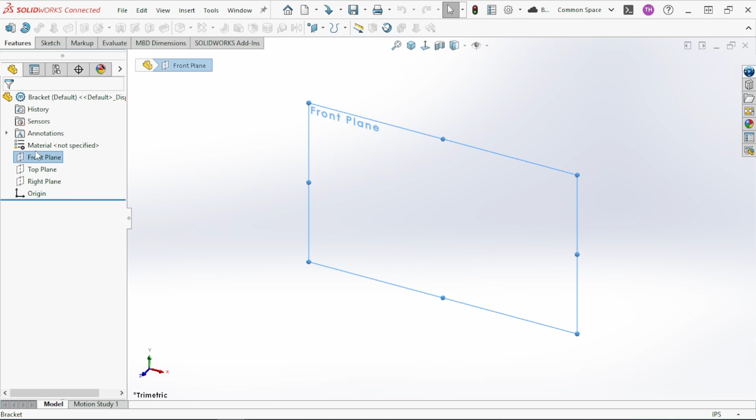So now that we've learned to make sketches and create features from those sketches, I'm going to put it all together and build a little mounting bracket and show you how I do it. So first we create our sketch. If you select a point and a line, you can add a constraint. So I just constrain that to the midpoint.

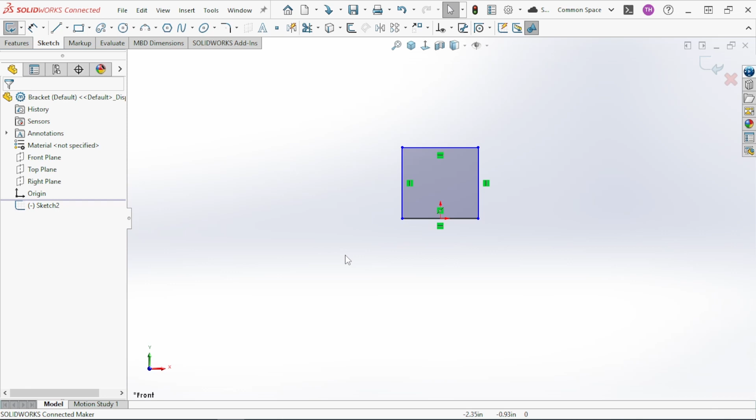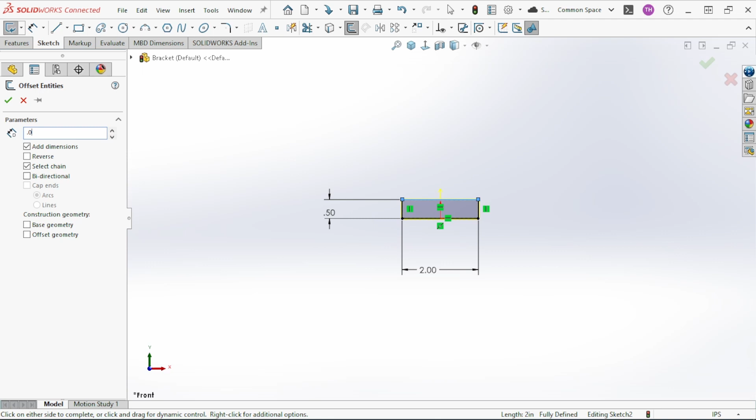I know I need my inside width 2 inches, the height 0.5, and here I'll show you how to use the offset feature. I want a 60 thou wall, and if you notice it offsets it. You can reverse it to the inside or the outside, and I'll extrude that 4 inches long. That'll be my little mounting bracket.

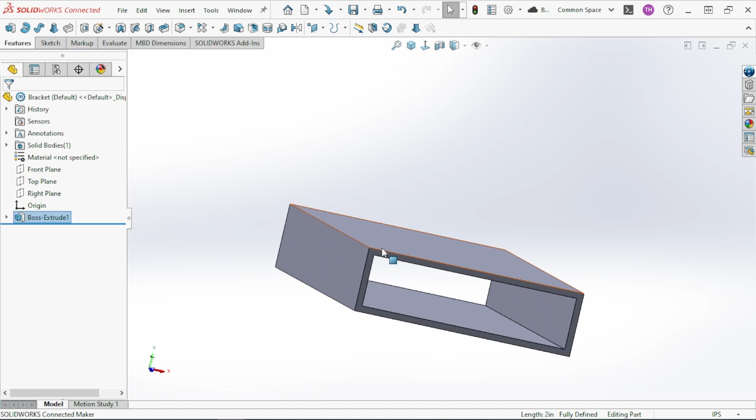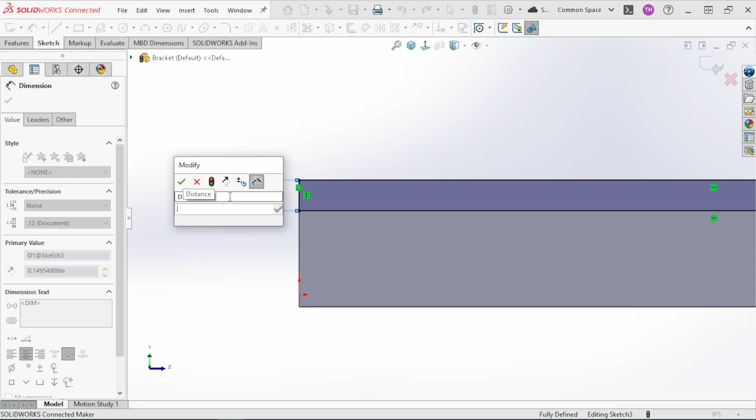Now I need to add some screw ears to it. So I select the face, create a sketch on that face. I want to extrude those out. And then I can mirror that.

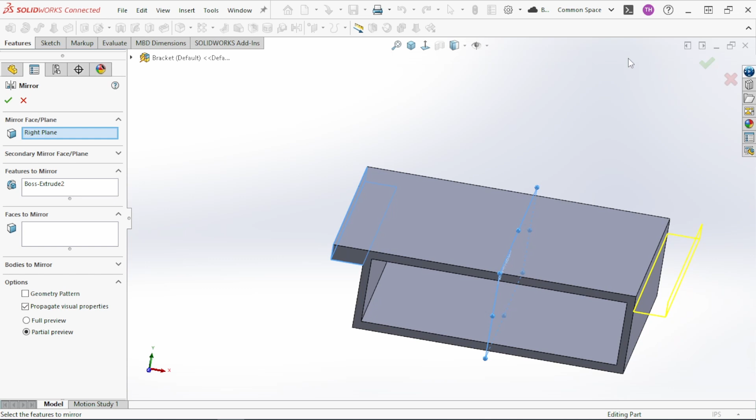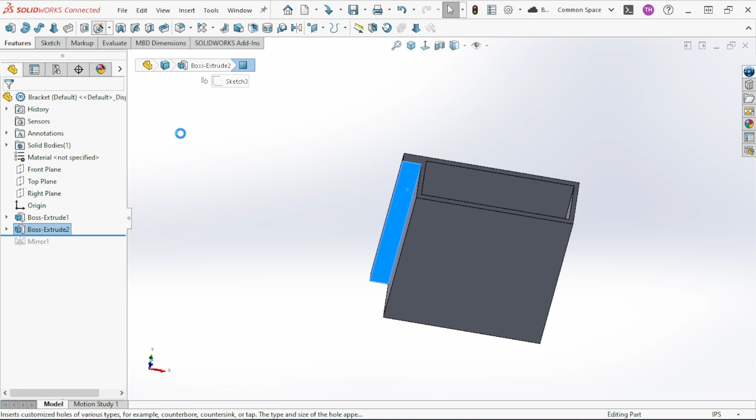And now that I've mirrored it, I forgot I want to put holes in it. So if I just click this bar and drag it up, it's like a temporary undo. So now I can hit my hole wizard and put some mounting holes in there. So I'm going to put in some screw holes, flathead screw, and I know they're going to be number 8s through all, and I can change the... so that way I know the heads will be completely recessed.

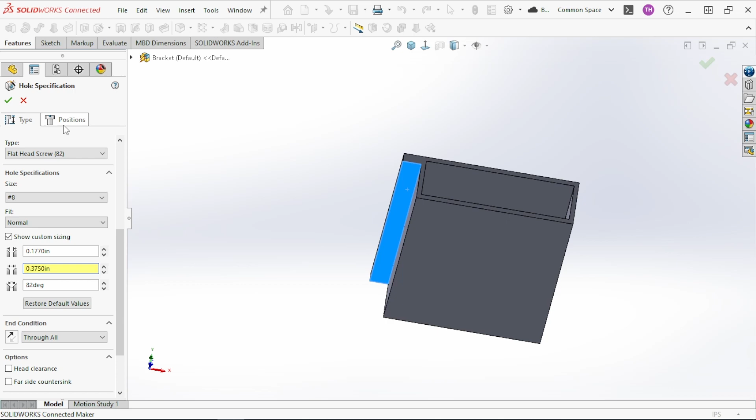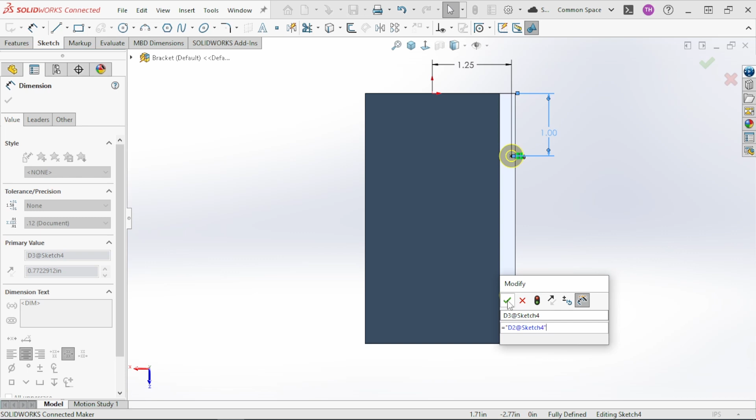So I come over here to positions, and I can see that my wings aren't anywhere near wide enough. And I can constrain these to be vertical. Dimension these. And if I want these always to be the same, instead of typing in a number, I can hit the equal sign, click on this dimension, hit OK, and then every time I change this one, the other one will change with it.

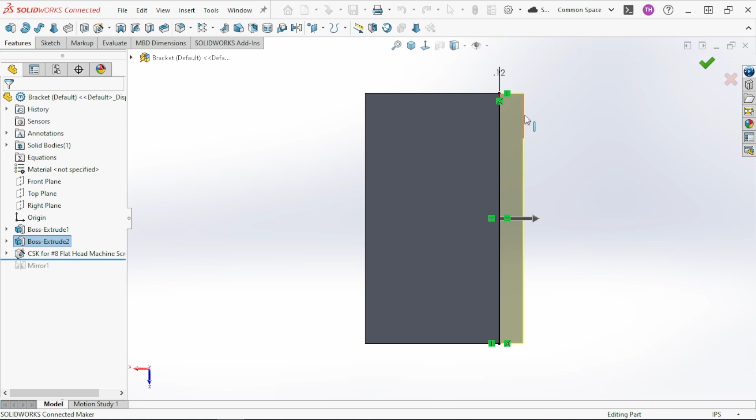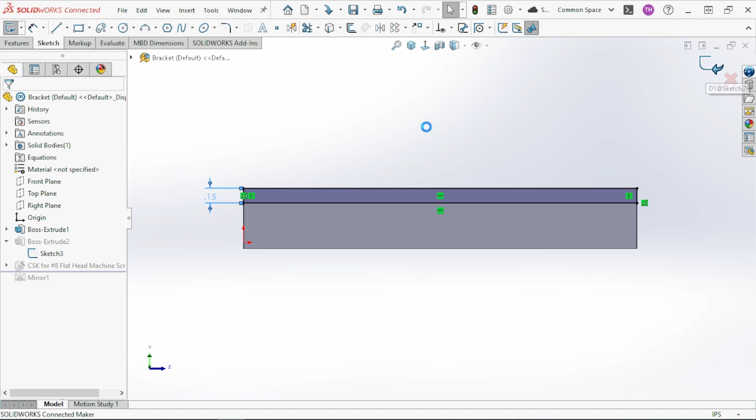So now that I got those located, now I can come over here and edit this feature and make that wider. You see there's not a lot of material left there, so I'm going to come back and edit the sketch and make it a little thicker. And now there's a little more material left. So now that I've done that, I can come down here and I can edit this mirror, and I can add my holes to it, and now I have features on both sides.

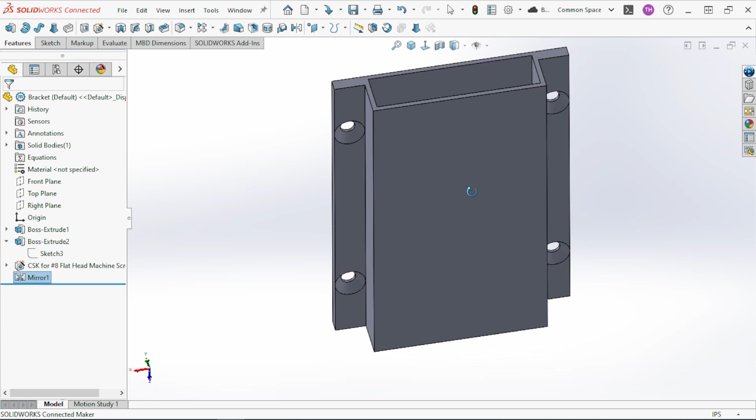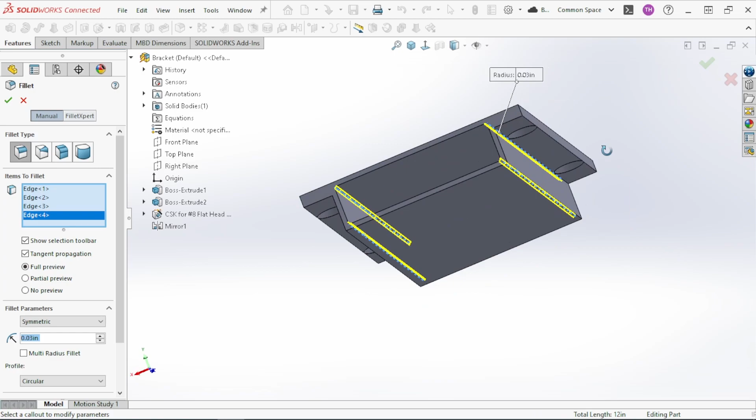The next thing I can do is I can come up here and hit the fillet command, and put some fillets in these corners. Just for a little extra strength.

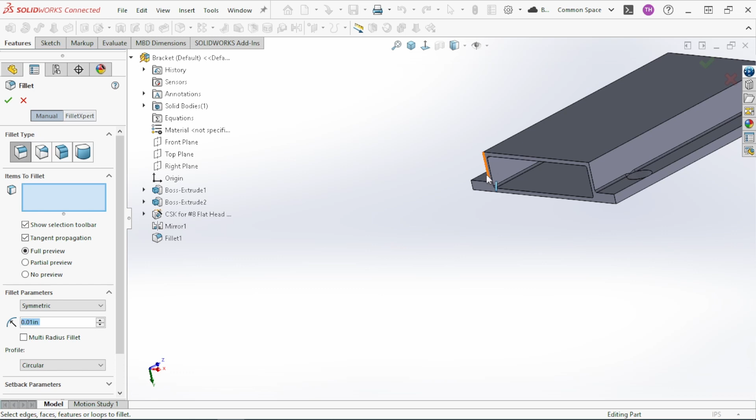And generally what I like to do is round off all my sharp edges. So I'll put a 10/1000 fillet radius on all the faces. So if you select the face, it'll put radiuses all along the edges of each face.

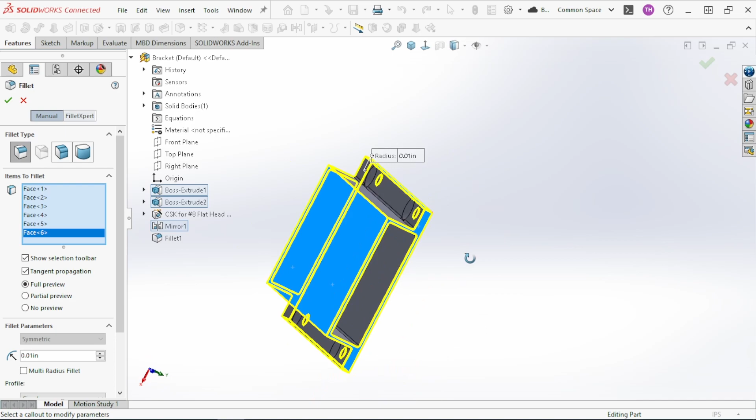And if you're wondering how I'm rotating, if you use your middle mouse button, you can click and move, and you can rotate around, and then you use your scroll to zoom in and out. And that looks pretty good. So now I have my screw holes. And now I'm ready to export it.

This is the one drawback of the SolidWorks for makers, is if you come up and just hit the save button, it saves it on the cloud. I don't generally do that, so save to this PC. And one thing that SolidWorks does like to do is crash. So I always tell everybody the save button is free. Use it early, use it often. And generally you can just go up here and hit save, but being this is cloud-based, you have one more step to hit save to PC.

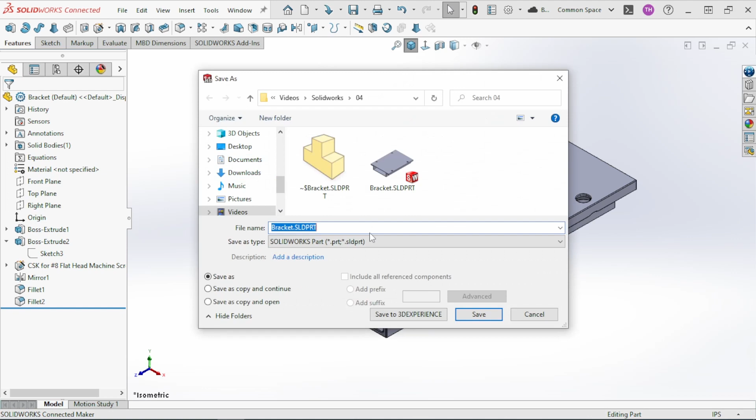Now we can come up and save as new, save to this PC, and this is where you save it as an STL. And then you come down here to your options, and you can change the facet size and tolerancing of your STL. And generally if you're using it for a 3D printer, you want to make sure this is set in millimeters. Hit OK, hit save, and it's ready for the 3D printer.